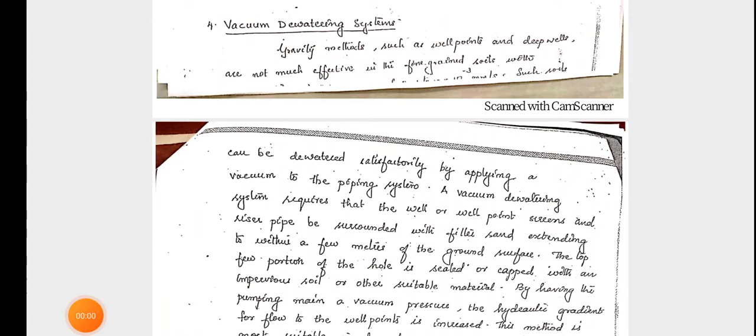So next is vacuum dewatering system. We already studied two systems of dewatering, that is well point and deep well. In both well point and deep well, lowering of the water table occurs with the help of gravity. Such a dewatering method is suitable for coarse grained soil such as sand, but it is not suitable for fine grained soil such as clay.

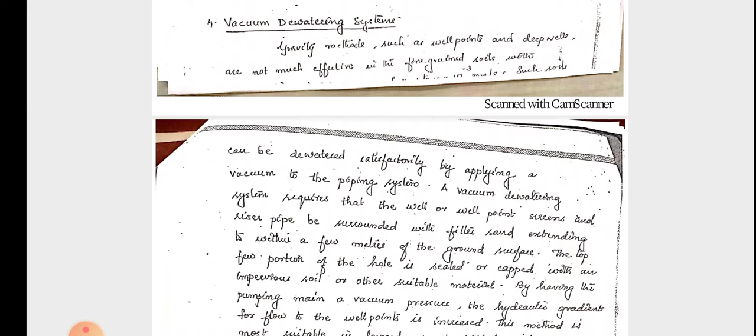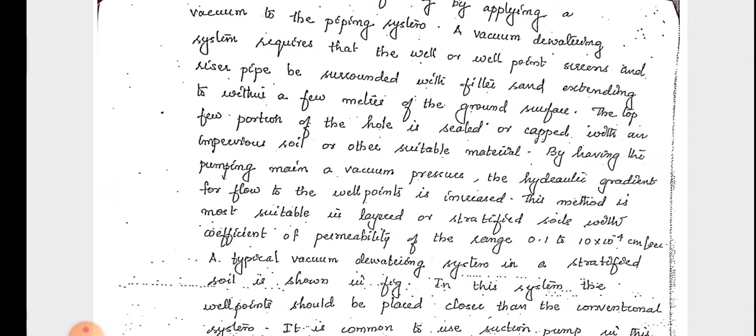So for such soil, we can use this method known as vacuum dewatering system. Here it requires a well, or well point screen, and a riser pipe which is surrounded by filter sand, extending to within a few meters of the ground surface. The top portion of the hole is sealed or capped with an impervious soil or other suitable material. By applying the pumping main a vacuum pressure, the hydraulic gradient for flow to the well point is increased.

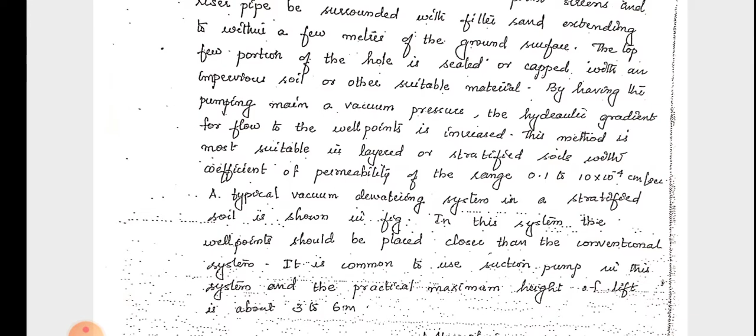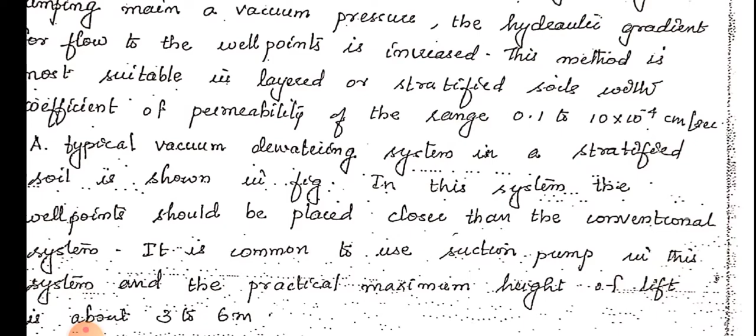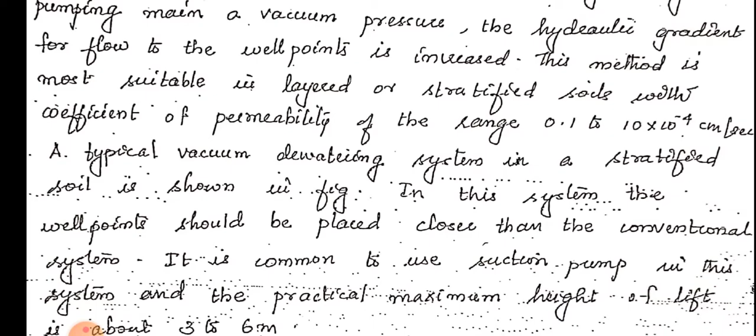This method is most suitable in layered or stratified soil with coefficient of permeability in the range. It's very important, the range is 0.1 to 10 into 10 raised to minus 4 centimeter per second. This type of method, vacuum dewatering method, is suitable for layered or stratified soil with permeability range 0.1 to 10 into 10 raised to minus 4 centimeter per second.

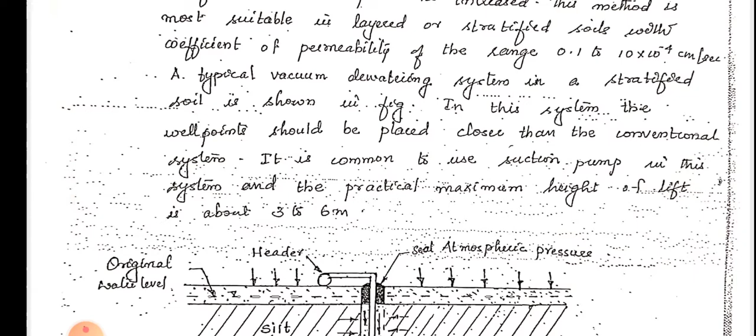A typical vacuum dewatering system in a stratified soil is shown in the figure. In this system, the well points should be placed closer than in the conventional system. It is common to use a suction pump in this system. The suction pump is otherwise known as a vacuum pump, and the practical maximum height of lift of water is about 3 to 6 meters.

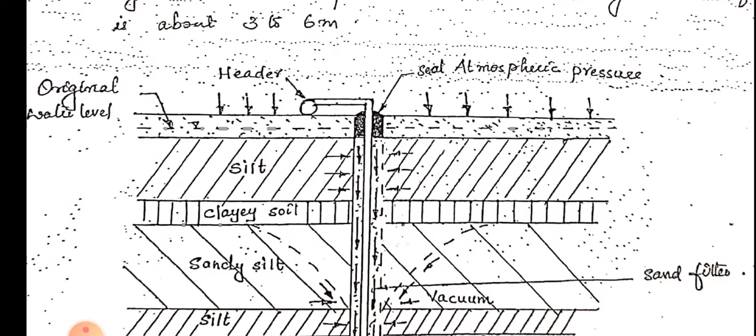So this is a vacuum dewatering system. This is a pipe, this is a riser pipe, and this is a borehole. In between the borehole and the riser pipe, there is a graded material like sand, so that the water can easily enter into the riser pipe.

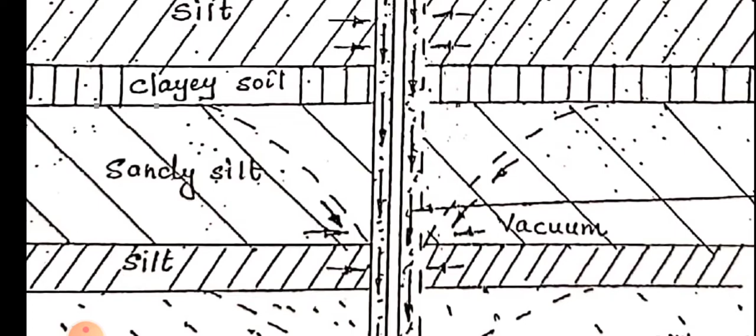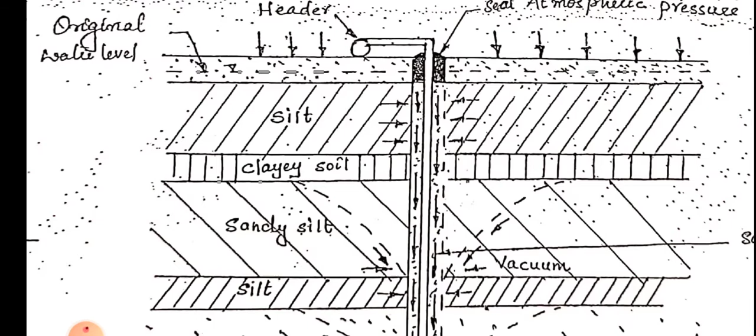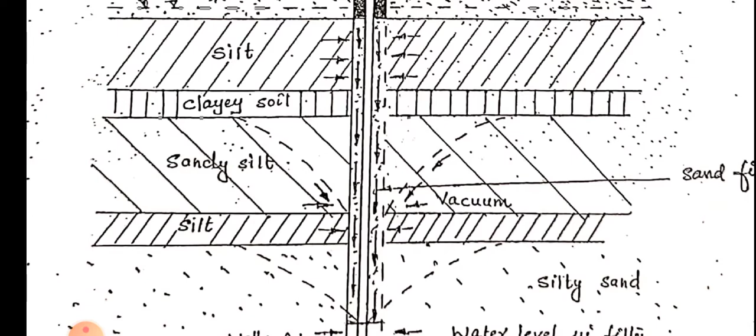Here the perforations are provided only for a few meters. This is a layered soil, so this system is inserted in a layered or stratified soil. It consists of a top layer of silt, then below that clay, then again sandy silt, then silty sand. So it consists of various layers of soil, and here majority it contains fine grained soil — silt, clay, etc. — which are fine grained soils.

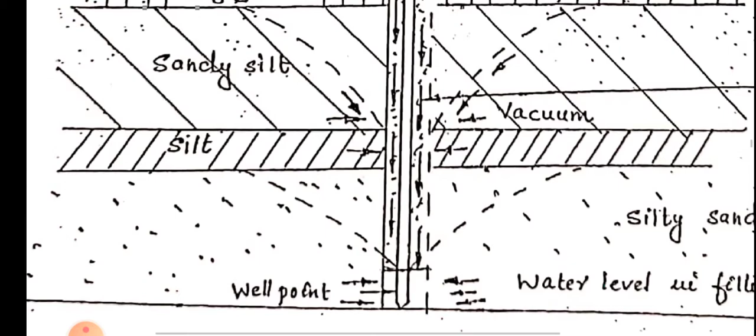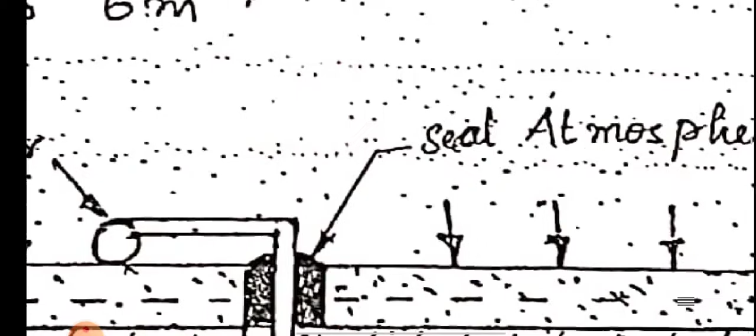So here this is a well point. Through here the water will accumulate at the bottom of the borehole, and by means of a vacuum pump we can pump this water out from the riser pipe. So in order to create a vacuum in the borehole, we need to seal the top of the borehole, sealing it from atmospheric pressure. So in order to create a negative pressure inside the borehole, we have to seal the top, then by using a vacuum pump, we can pump the water out.

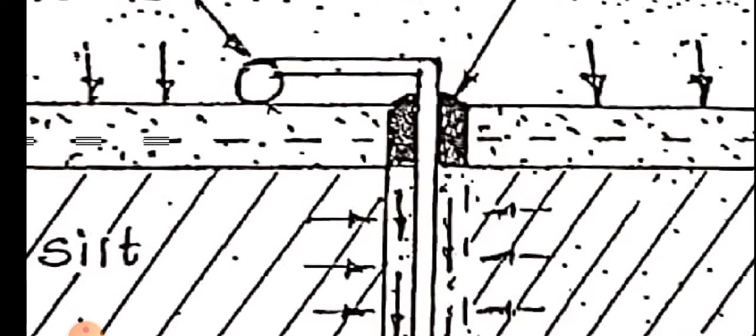So this method is efficient for stratified soil containing fine grained soil.